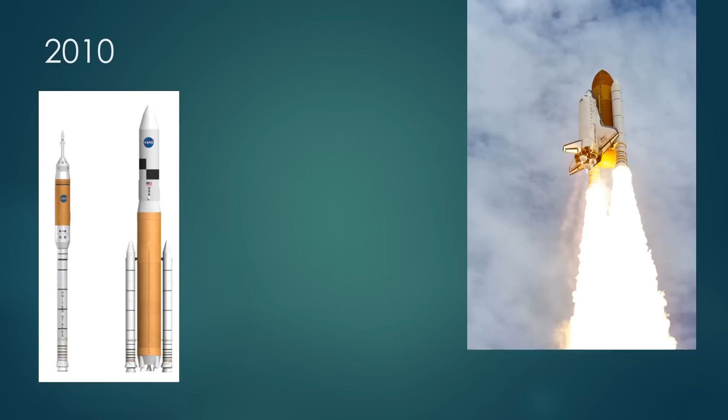Then in 2010, we had an investigation that looked into how much Constellation was really going to cost. The result was: we know the shuttle's going away, it's going to stop flying, and it turns out Constellation really isn't affordable. You actually cannot do Constellation plus space station plus retiring the shuttle on the budgets NASA gets.

So Constellation got canceled. Here we are in 2010, a year away from shuttle retiring, and not only do we not have a solution to launch astronauts, we don't even have a plan for a solution. At that point, Congress stepped in and directed NASA to build something they called a Space Launch System.

Here's the actual verbiage. The important part is a fully integrated vehicle capable of carrying a total payload of 130 tons or more into low Earth orbit, in preparation for missions beyond low Earth orbit. That's a really big rocket.

The Saturn V that was used on Apollo could lift about 140 tons to low Earth orbit, so same class here. They also said make it a goal to achieve full operational capability by the end of 2016. So this is a pretty challenging thing to do.

So what did NASA do? Well, the NASA administrator, Bolden, decided to do something kind of different. He set up a competition, and NASA organized 3 teams, and each team would come up with their best designs in a specific area - here's the kind of rocket we think your team should concentrate on, go off, look at a bunch of different options, and figure out what you might be able to create.

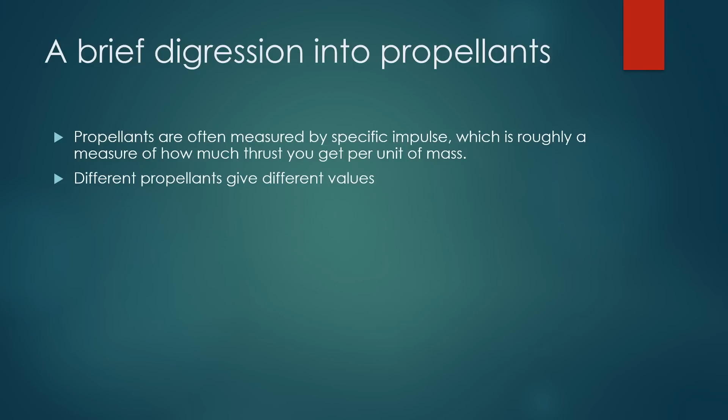You can think of it a little like fuel mileage for a car. Different propellants give different values, simply because the chemistry is different between different propellants.

An engine like the RS-25, used on the space shuttle, uses liquid oxygen and liquid hydrogen. It has a specific impulse of 366. To compare, the RD-180, similar in design to the space shuttle main engine, uses liquid oxygen and RP1. It has a specific impulse of 311.

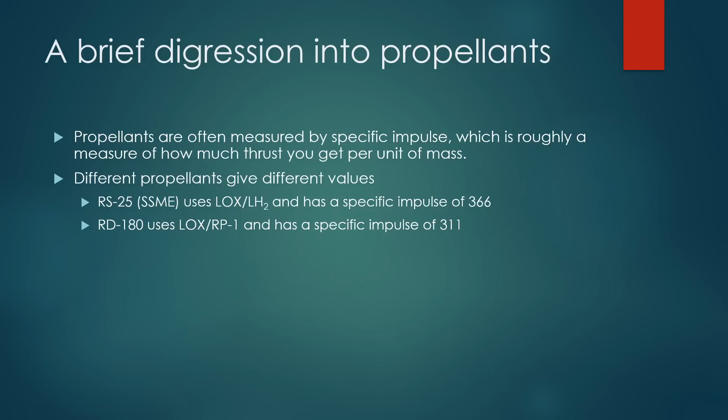So you look at those two numbers and say, well, 366 is better than 311, so we should always choose that. But there's a really important caveat here.

Liquid hydrogen is about one-tenth the density of RP1. So to have a similar mass of liquid hydrogen, you need a tank that's 10 times as big, with 10 times the volume.

Now, if you factor in the differences in specific impulse and the fact that you're not just running liquid hydrogen or RP1 alone, you also have to carry liquid oxygen, you run through all the numbers and look at this.

There's a measure called density impulse, which takes the specific impulse and factors in how dense the propellants are. And you find that liquid oxygen RP1 has roughly double the density impulse of liquid oxygen liquid hydrogen.

That means, all other things being equal, a first stage using liquid hydrogen would be about double the volume of a first stage using RP1. So it's especially important for the first stage, because that's where the tanks are biggest.

A bigger tank can be problematic, not only in building it and having it be heavy, but you may not actually be able to ship it where you want to. This is one reason why most current liquid oxygen, liquid hydrogen designs have solid rocket boosters on the sides — building a tank big enough is actually a supreme challenge.

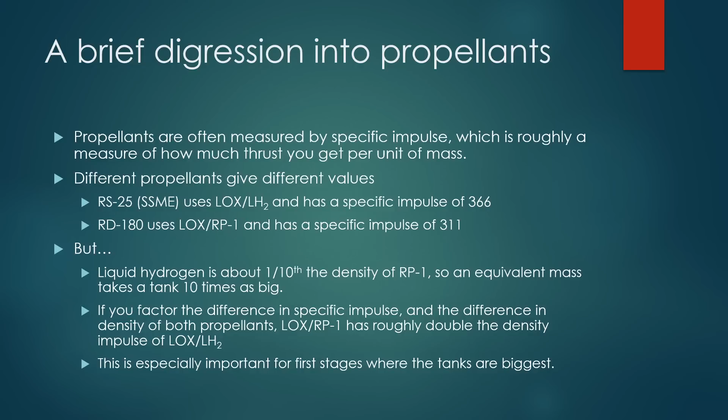For upper stages, specific impulse is more important than density impulse. So for upper stages, liquid oxygen and liquid hydrogen tends to be a better choice.

So this team is looking at liquid oxygen and RP1, and they have to figure out what engines they're going to use. This may seem backwards, but rather than building a rocket and looking for engines, generally you look at engines first to figure out what rocket you could build — engines you can either have, or think you can develop, or ones you'll build from scratch.

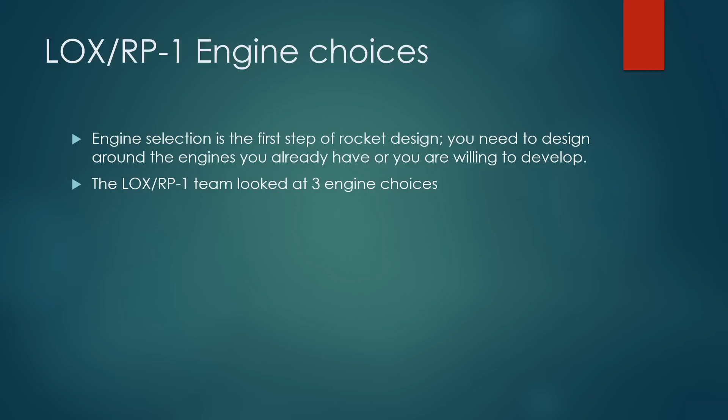So the LOX RP1 team looked at three different engine choices. The first one they called 2 Mlbf GG. So what does that mean? 2 Mlbf means an engine that produces 2 million pounds of thrust.

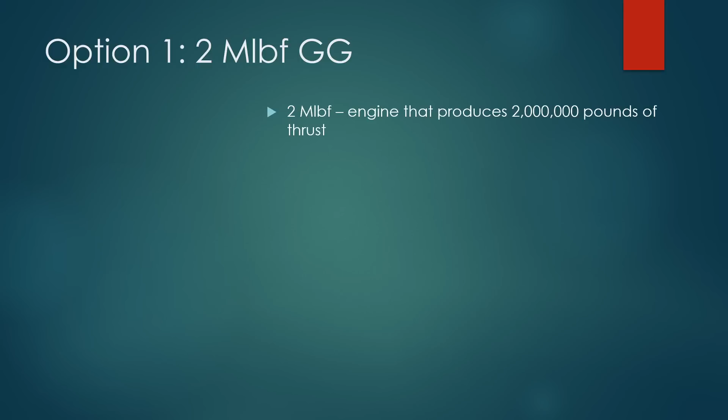That would be a very big liquid rocket engine — in fact the biggest liquid rocket engine ever built. GG means gas generator. Just like there are different engine types in cars, there are different engine types for rockets, with different difficulty to build and slightly different efficiency.

You can think of a gas generator as a simple, well-understood design. It's not as efficient as some of the other designs, so you're trading off simple and well-understood for efficient.

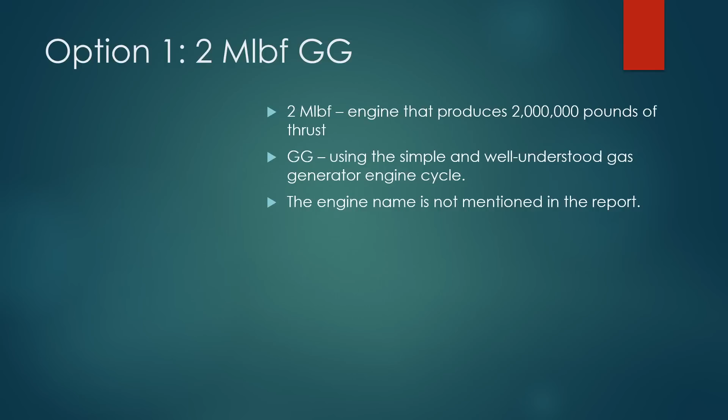Now, the report that talks about all of these never mentions an engine they were thinking about when discussing this specific choice. But it's really obvious there's only one engine candidate that could even come close: the F1 engine used in the first stage of the Saturn V.

The F1 engine produced 1.5 million pounds of thrust. So it's in the right ballpark, and it is a gas generator engine. So the big gas generator engine they mean is the F1.

Now, the problem is it's not quite big enough. So how would we deal with that? How would we get more thrust out of it?

Well, it turns out in the late 1960s, while the Apollo program was running, the manufacturers actually did a version of this engine called the F1A. It was uprated to 1.8 million pounds of thrust, getting pretty close to 2 million. Now, the problematic thing is that was the late 1960s, and we're now 40 or 50 years later.

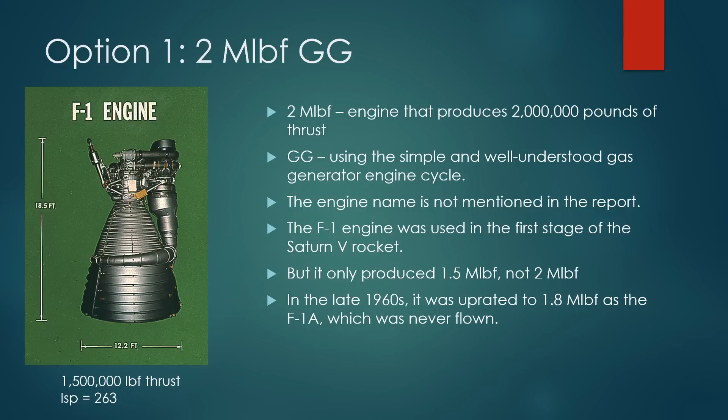And we don't build engines the same way, and this turns out to have been a fairly expensive engine to build, even though it was a simple design. So we can't just say, hey, let's just build these. We'd have to come up with a new way of doing that. And how would we do that?

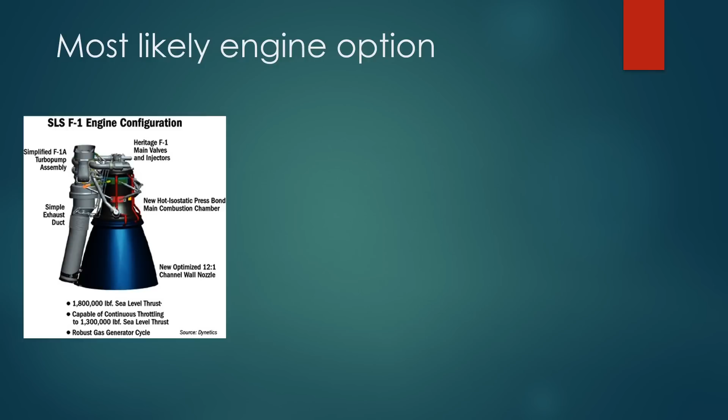A few years after this report, there was an approach to figure out what NASA was going to do for SLS Block 2, the version they actually chose. Block 2 required high-performance side boosters. One of the companies that bid on them said they were going to take the F1 engine and do a new version. So we actually have a pretty good idea from what they said, what the team might have been thinking about. This was going to be a version known as the F1B.

It's expected to generate 1.8 million pounds of thrust like the F1A, but be much cheaper and easier to build. If we look at the diagram on the left, it says simplified F1A turbopump assembly. So you're essentially taking the F1A, taking some other stuff from the F1, changing the main combustion chamber and how you build that, changing the nozzle and how you build that, and then changing kind of the ducting.

If you know anything about SpaceX, you know they have a Merlin engine that is also a RP1 gas generator. And it kind of looks like this. It's much, much smaller in terms of thrust, but conceptually it's a similar sort of thing. So this is pretty much very likely what the team was thinking about.

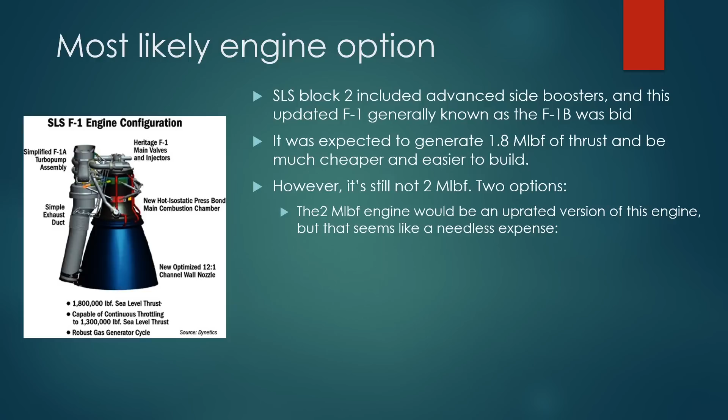However, it's still not 2 million pounds of thrust, and it's not really clear to me what the team was thinking. I can see a couple options. It could be that they were thinking of something like this, but uprated further. To me, that seems like a needless expense.

We know that the Saturn V, on the original F1, could lift 140 tons to LEO, which is bigger than the 130 that they were trying to do. We also know that the F1A was 20% more powerful than that. So clearly, if you build something like that with either the F1A or the F1B, you're going to be able to do 140 tons to LEO.

So I'm not sure why you would try to go to 2 million pounds. It could be that they weren't actually trying, and they were just kind of ballparking. And of course, this engine would have been cheaper than the 2 million pound version. It could be just that it's a rounding error, and they were just talking about an engine like an F1B. But I haven't found anything that tells me one way or the other, any documentation. So that's kind of a mystery.

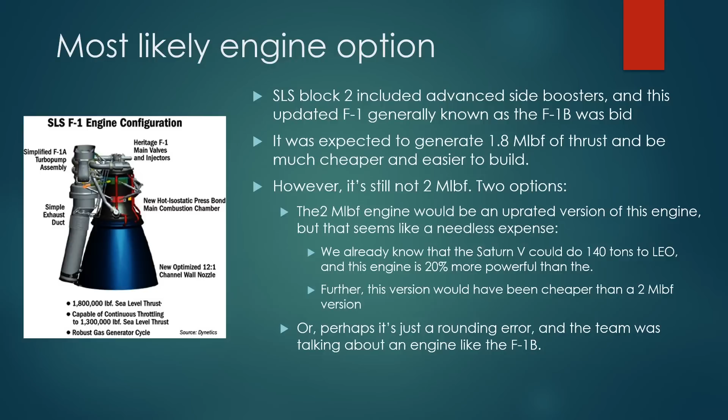The second engine they looked at is an engine called the RD-180. Most of the US development went towards high efficiency, what are called stage combustion, liquid oxygen, liquid hydrogen engines. Now, stage combustion engines are much more efficient than gas generator engines, but there was believed, at least in the US, to be a problem with building a stage combustion LOX RP1 engine.

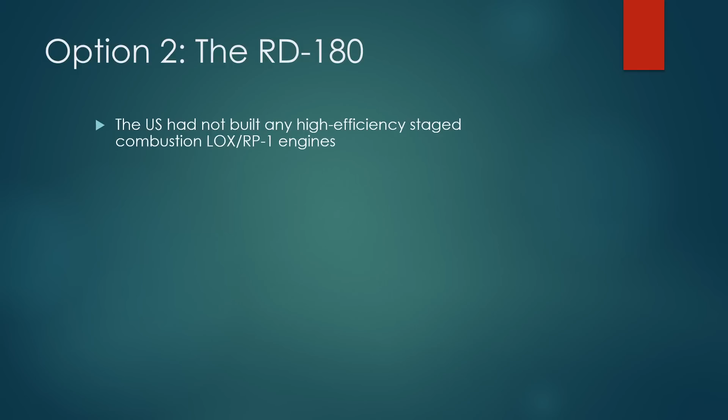The problem is that such an engine has to deal with high temperature, high pressure oxygen, which is really hard to deal with in the presence of metals. So you need to build your engine out of metal, you have high temperature oxygen around, and it's going to want to erode away. There was a belief, at least in some places, that you really couldn't build one of these. So the US focused on the liquid hydrogen ones, where you don't actually have this issue because you're not dealing with hot oxygen. It turns out the Russians disagreed.

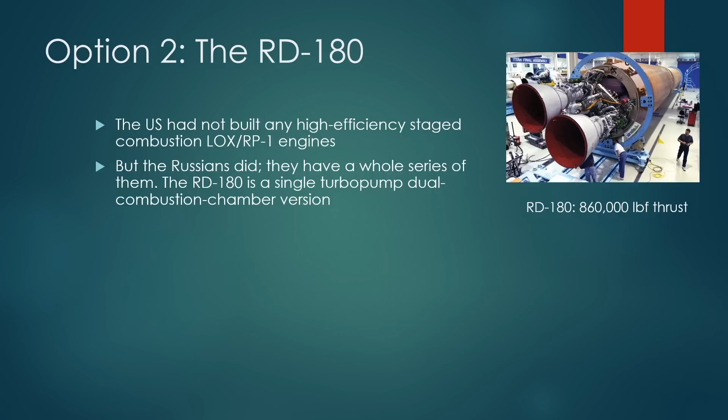And this is kind of curious. On the other side, you notice in the background there's a label that says final assembly, and that's in English. This is in fact an Atlas V rocket with a Russian RD-180 engine on it. The Atlas V has been flying with a single RD-180 engine since 2002, and supposedly this engine costs them about $10 million each, which is really cheap for a high efficiency engine like this.

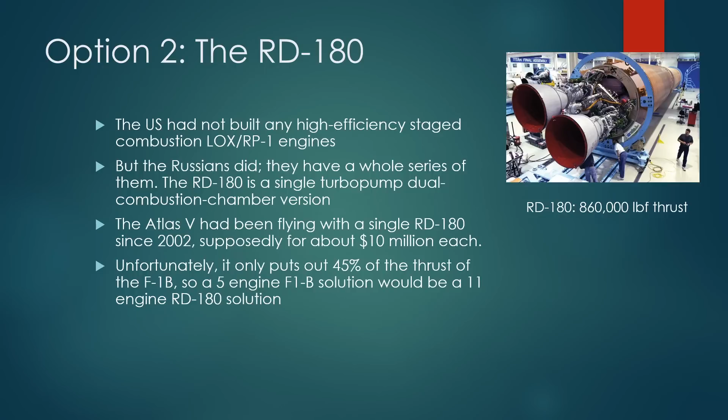Unfortunately, if we look at the thrust, it's about 0.8 million pounds of thrust, so it's a lot less than the F1B. If you're comparing an engine design with 5 F1Bs, and you want to use the RD-180, you need 11 of them, and that's not really tenable.

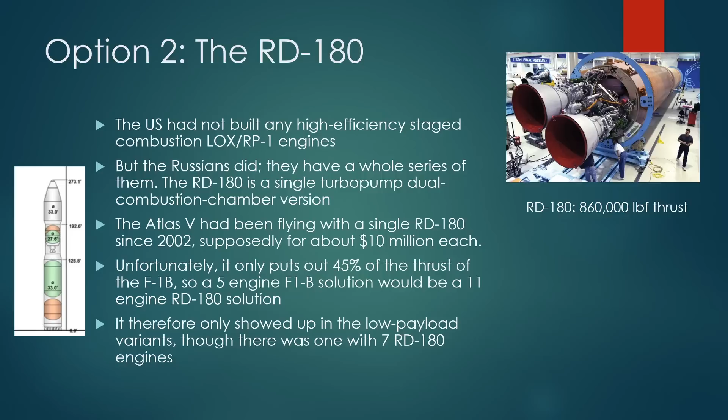They did do some designs. I show one on the left that had 7 RD-180 engines. If you look at the bottom, you can see there's just a whole bunch of nozzles there. But they couldn't really get it up to the payload range they wanted, just because they don't have quite enough thrust. So, nice engine, this really wasn't an option that seemed viable for them.

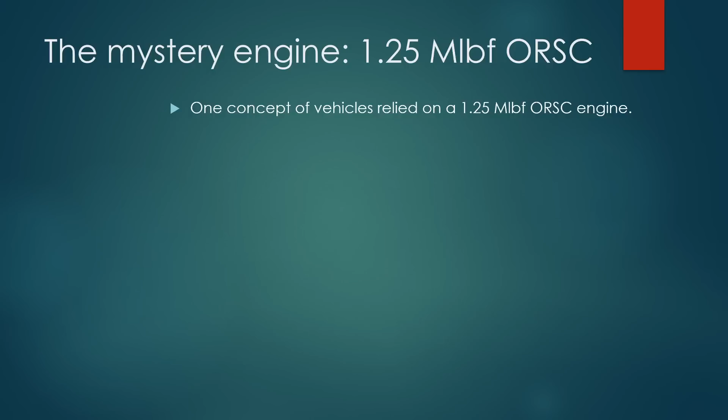Option 3 was what I'm calling a mystery engine. This is a 1.25 million pounds of thrust, ORSC, oxygen-rich stage combustion, essentially like the RD-180 I just talked about, but with more thrust. The Air Force really wanted this engine as a replacement for the RD-180.

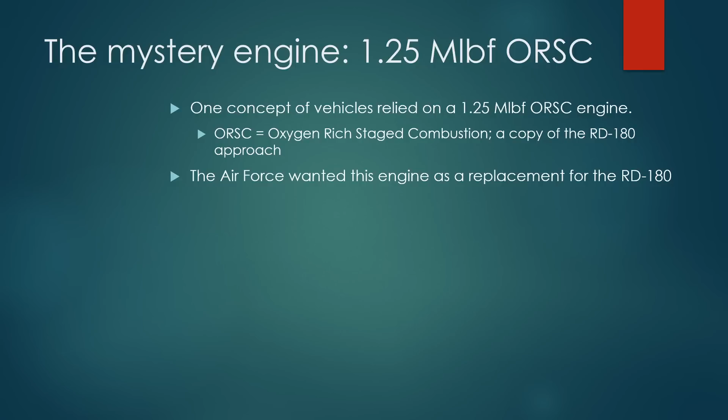The reason they wanted it as a replacement is the Atlas V launches a lot of Department of Defense classified satellites, and having one of your main launchers for those satellites depend on an engine made by another country seems like not a great position to be in. So the Air Force wanted an engine that they could use instead of the RD-180 in the Atlas V, or maybe in a new rocket.

They are a little less than 1.25 million pounds of thrust, and this may be like the F1, that the team was just basically using a ballpark figure rather than looking at actual engines. The problem with these engines was that when you got to heavy lift, you required either 3 stages or strap-on boosters. They could do the medium stuff, but when they wanted to go with really high payloads, you needed to go with those options.

And that's problematic from a development perspective. If you have to build a 3rd stage, that's another stage you're building, so another contract, much more complexity. Similarly, if you add strap-on boosters, that's like a whole new launcher, and you have to do everything, all the design for that, and then it makes staging harder. So it's just a little more complicated.

The team liked this approach, but when they looked through how it ranked based upon the big one, the 2 million one, it just didn't rank quite as well.

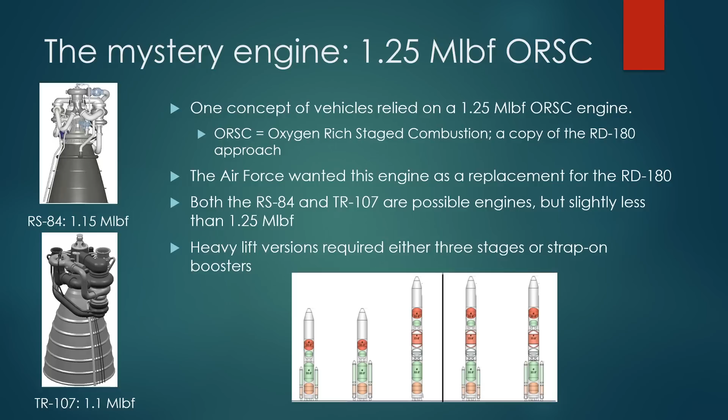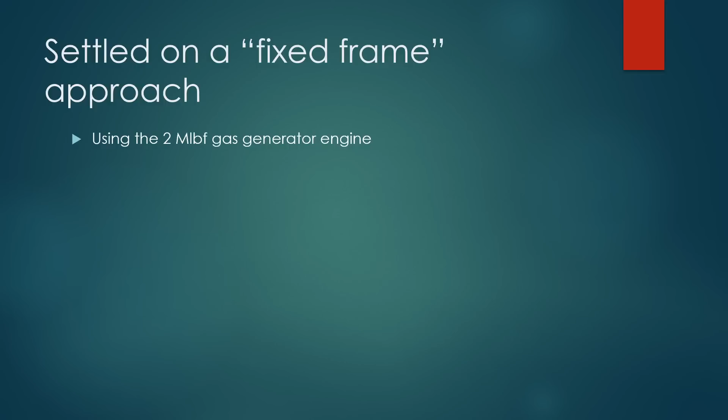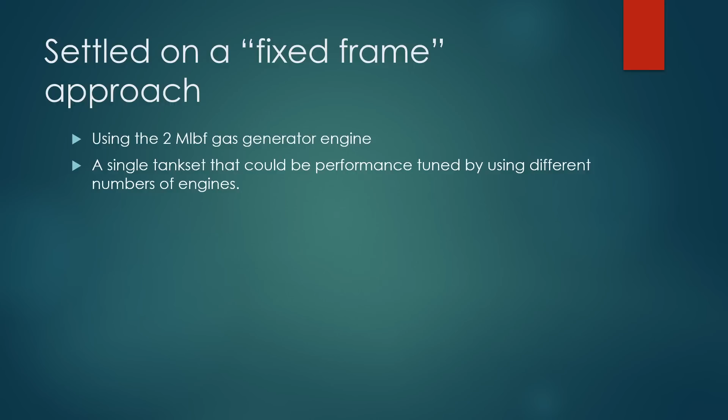So they went through and they finally settled on what they called a fixed frame approach. They're going to use the 2 million pound-force gas generator engine, the F1 engine, and they're going to build a single tank set. By that they mean we're going to build a first stage of a given size, and we're going to build a second stage of a given size. Then we're going to play around with performance by using different numbers of engines.

And they give some dimensions, and they give us this very nice chart, very nice slide that shows some of the different options. So if we look at the diagrams on the right, we can see that we have a vehicle called 4-2. It has 4 F1 derived engines in the first stage, and then it has 2 J2 derived engines.

Now, not coincidentally, the F1 engine was the first stage engine on the Saturn V, and the J2 engine was the second stage engine on the Saturn V. So we're essentially taking a Saturn V and upgrading both of the engines. Then they had options all the way up to 7 F1 engines in the first stage and 5 J2 engines in the second stage. You can obviously figure out that's going to be quite a heavy lifter.

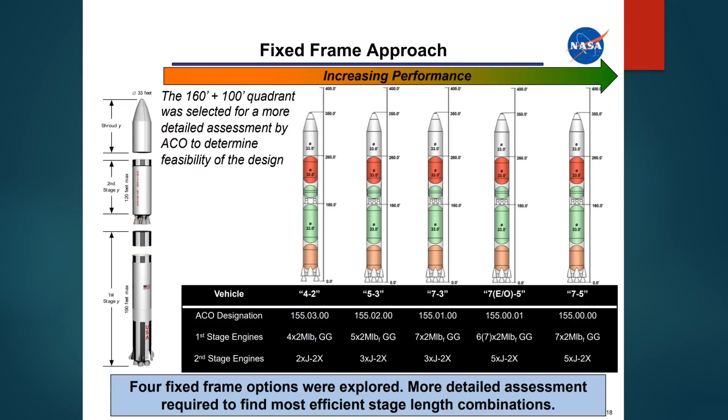And very nicely on the left side, they gave us this nice drawing that showed us kind of what they were thinking of in size - size of the first stage, size of the second stage, and then we had payload on top. They also tell us that they're thinking about a 33-foot diameter, and 33-foot diameter also is the diameter used by the Saturn V. So it turns out if you kind of put these two rockets next to each other, guess what? They look very much alike.

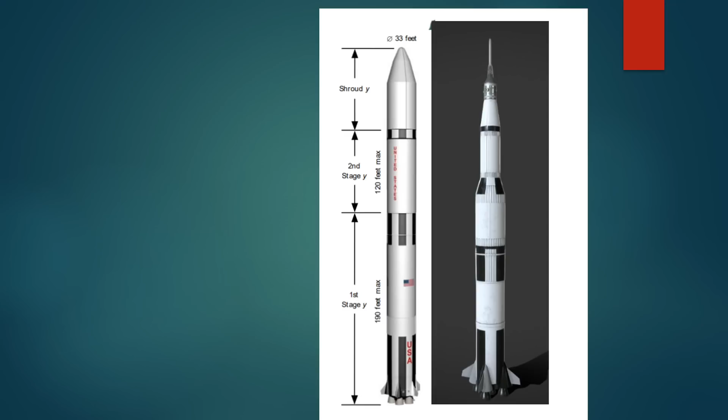And the scaling was done pretty quickly, so I think it's probably not perfect, but it gives you a basic idea. Basically what we have with this new rocket is it's like a Saturn V, but the first stage is longer and the second stage is longer. And that's kind of where they ended up.

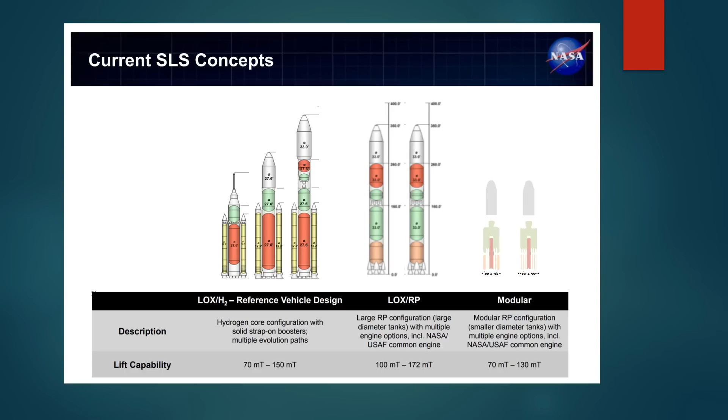So that's the rocket that they're proposing, and then we have the other rockets by the other teams. So what happened is that came back, went into a document, and then a group got together and looked at the various designs and tried to summarize the pros and cons for each approach.

So I'm going to talk about Team 2, pros and cons first. They said the large RP rocket consistently ranks as the most capable long-term solution: high margins, simpler operations, greater cost incentives due to competition and designing from a clean sheet. That's a really important statement. They think this is superior because of this.

Now, in this case, margins doesn't mean monetary. Margins means from a performance perspective. Because of the design they're using, they think not only will this rocket do what they need, it has enough extra performance that we're very confident we can get the performance we need, even if we have some weight issues or other issues.

They also said high top-end performance, easily attained for any future mission. So I think that is related to the option of adding more engines and actually getting higher performance.

Best LOC LOM due to engine out capability. This is pretty simple. LOM means loss of mission, and LOC means loss of crew. Basically what this is saying is if you have multiple engines and one breaks, you have a better chance of completing the mission and not killing the crew, because generally you can just run the other engines longer. So that tends to be better than what they saw for the other teams.

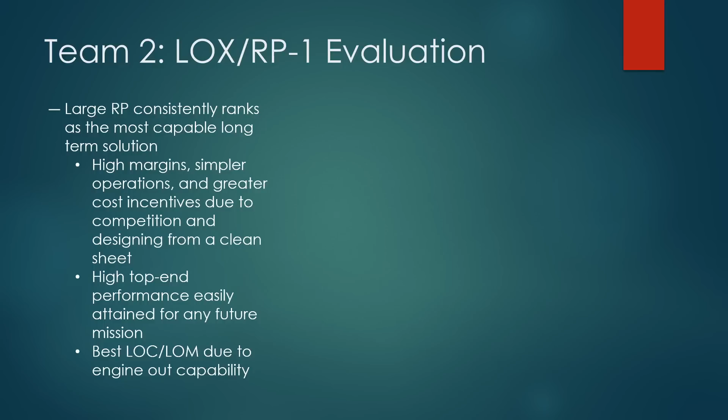Negative attributes: high peak development cost of new propulsion and delayed flight schedule. What they're basically saying here is that because we're developing new engines, or at least upgrading existing engines, we're going to have to put a lot of money into development to get those up and running. That means at the beginning of the program we're going to see a big spike as we're spending all that money, and once we've done that development, it'll come back down.

Congress tends to give NASA a very steady budget of a fixed amount year after year, which means you can't really absorb these big spikes within a fixed budget unless you take money from somewhere else, and that's pretty disruptive. So NASA has this ongoing problem across all their programs of how do we take these spikes and de-spike them, or spread them out. What that means is if you have a big spike inherently, you're going to have to spread it out—it's going to take longer. So that's what they're saying here.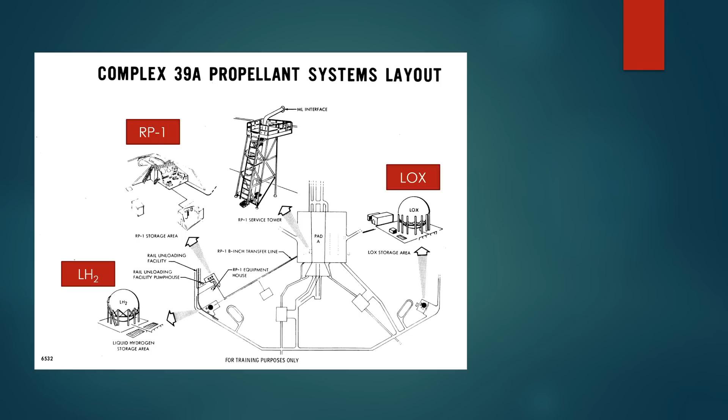But then Shuttle came in, and Shuttle didn't use RP1, so NASA essentially abandoned that part of the infrastructure.

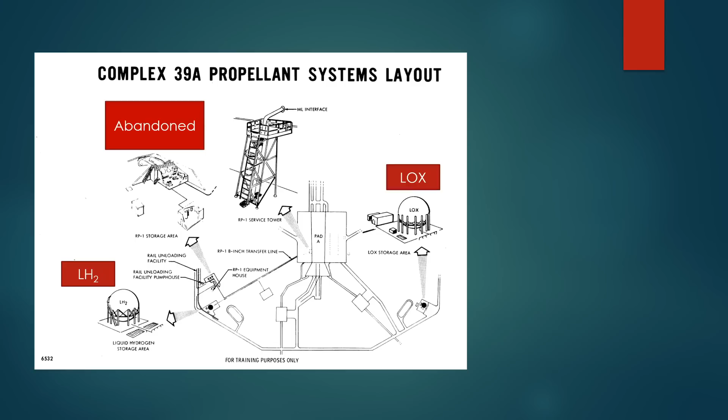And the fact is, the launch site is in Florida—it's very moist, it's very salty, and 40 or 50 years of that doesn't do nice things to infrastructure. So you can see this is a picture of purportedly the RP1 line at one of the pads, and you can see that not only are the supports all rusted and messed up, the pipeline is just missing in places—it's broken and fallen apart.

So it's definitely true that if you're doing something at Pad 39A or 39B, you're going to have to go through and redo the RP1 stuff if you're going to use RP1. But it turns out that SpaceX has leased Pad 39A, and their Falcon rocket uses RP1 and liquid oxygen, so they had to go through and do this.

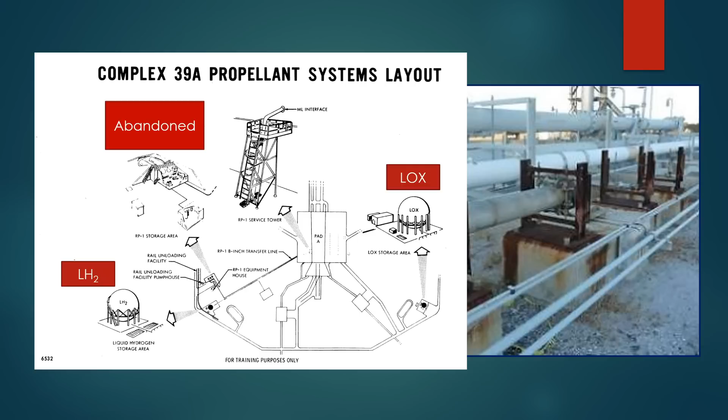And it apparently didn't turn out to be a significant problem for them to either refurbish or replace all of the RP1 infrastructure. So I find it a little strange that this level of thing made it to the cons, but that's what they're talking about there.

So that was Team 2. Let's flip over and talk about Team 1, the shuttle-derived one. And they said shuttle-derived architecture consistently provides an early, highly capable solution, and they gave two subpoints. The first is existing assets provide a fast, low-cost start flight test. What they mean is existing assets is existing shuttle hardware. So they have shuttle engines left over from the shuttle program, and they can easily get solid rocket boosters made. That means you can take those assets, put them together, and fly pretty quickly.

Unfortunately, you notice it says start flight test. It lets you fly pretty quickly, but you're not actually flying the vehicle that you're hoping to fly in the future. You're just flying an earlier version.

Similarly, acquisition options provide a fast start. And that just means you either have existing shuttle contractors or contractors working on Constellation. They already know how to build these things. You already have contracts with some of them. You can just roll those over and it'll be smooth and quick.

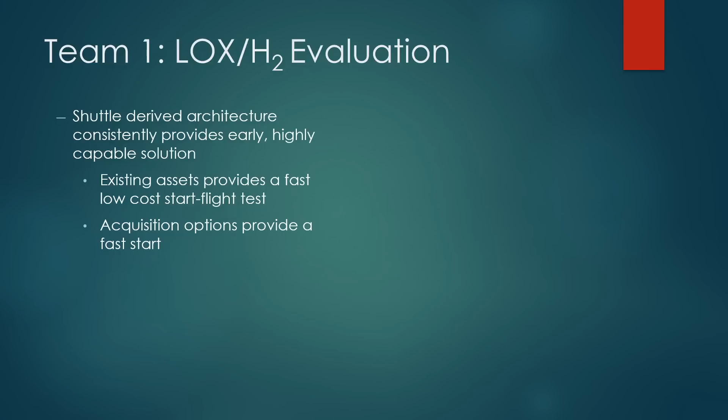On the negative side, they say, like on the RP1, the negative attributes of shuttle-derived remain: high propulsion systems, production and op costs due to complex reusable systems, and infrastructure designed for higher launch rates than projected for SLS. So it's really talking about two separate things.

The complex reusable systems is likely a reference to the shuttle main engine. So the RS-25 is a wonderful main engine. It worked very well and was very reliable during shuttle. Most of the engines flew 10 or 15 times, so it's also a very, very high performance engine. That's also good. The unfortunate thing is it is a very, very expensive engine.

And now you're taking this very expensive engine that you used to fly 14 times, and you're going to fly it once. And you actually need 4 of them rather than the 3 you had on the shuttle. So it means you're taking this engine that is designed for a different use, and it's going to be very expensive in this use.

The infrastructure designed for higher launch rates - if you look back at what shuttle flew, they were flying anywhere 8, 7, 6, maybe down to 4 flights a year. If they're flying 4 flights, that meant they needed 8 solid rocket boosters, which meant the company building the solid rocket boosters has infrastructure that allows them to do 8 of them in a year, or more - maybe 16 in the earlier years. So given size production line, a given size facility.

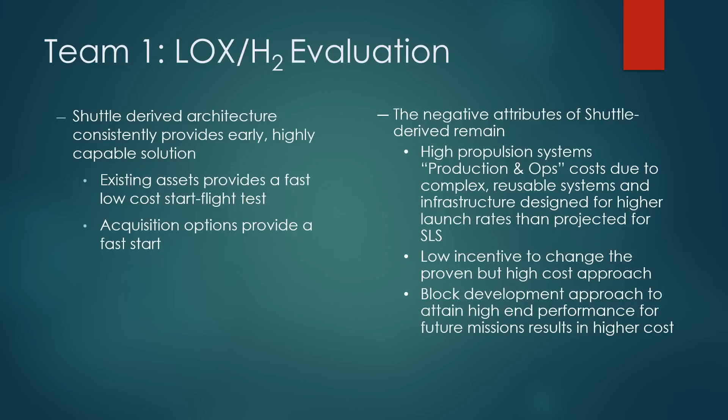And not only does that result in a higher cost, you're building some parts over again. It's just a lot more complicated. So, as I said, all of those look like reasonable things, but there's one more that showed up on the evaluation here, on the positive side. And it said, this shuttle-derived version is the only option that maintains U.S. lead in technology and skill base for large liquid oxygen, liquid hydrogen, and large solid rockets.

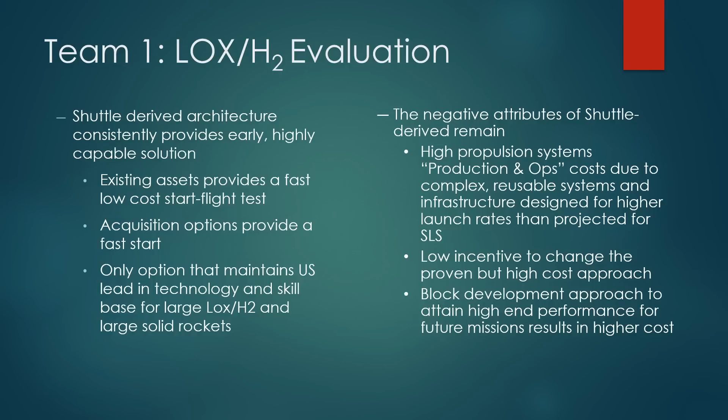And this is kind of a confusing thing to see. It's really not like anything else. So all the other things are about how each system relates to being able to accomplish the goal. But this is about technology and skill base. And that's really not related to the actual goal. So the question is, why is this in here? Where does this come from?

And to do that, we need to go back and look at the appropriations bill that set up SLS. And there are two really interesting clauses in here. The first one says NASA needs to ensure the retention, modification, and development of critical skills and capabilities as appropriate in areas related to solid and liquid engines, large diameter fuel tanks, rocket propulsion, and other ground test capabilities. So those are specific, the kinds of things that were listed in that advantage for the shuttle-derived systems. So basically that's saying Congress told us that we needed to try to keep our technological lead in all of these areas, and shuttle-derived is the only one that gives us that.

Further, there's another clause. It requires the administrator to utilize existing contracts, investment, workforce, industrial base, and capabilities from the Space Shuttle and the Orion and Ares 1 projects, which are constellation projects, and shuttle-derived and Ares 1 components that use existing U.S. propulsion systems. So we basically put these two together. It says you need to make sure to retain the skills and capabilities in things that were used to build shuttle, and you need to utilize existing contracts, which all would have been constellation related to shuttle, investments, workforce, and anything. So this is largely viewed as the Senate saying you can build whatever, the Congress saying you can build whatever rocket you want as long as it's shuttle derived.